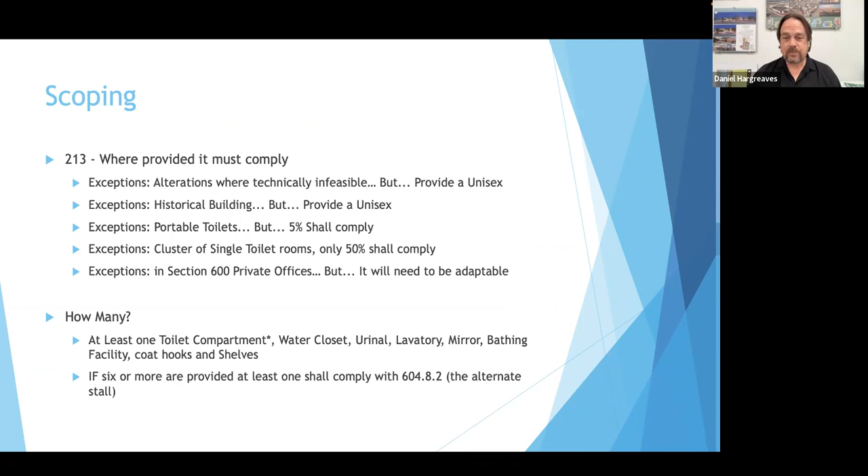So let's talk about that reach range for a second. So this is where the operational part of the device is. In these 2 photos here, surprisingly, both of these are non-compliant. Those are 1 foot tiles. Your reach range is 4 feet, and you can see that paper dispenser is above that 4 foot mark. That hook, the person didn't want to put it in the thin part of the door, but that's almost inaccessible for anyone that's 5 foot or shorter. So even something as simple as a hook, while you can get to whatever's hanging up there, you can't reach the hook itself.

So in the big picture, what is the reach range? This is in section 308, the building blocks. Anything from 15 inches off the floor to 48 inches above is within the reach range. And you're going to see I've done a little minor update. Of course, I mistyped it there, but in the 117.1 2017, there's no change to this reach range, and that's forward or side.

There used to be in the previous one, and you'll still come across this. The best example is typically a thermostat set at 54 or even 60 inches, which is outside of all reach ranges. While a thermostat is something where you're wanting to read the device, if you set it at 60 inches, which is a nice height to see what the temperature of the room is and to adjust it, in a wheelchair, front approach or side approach, you can't reach it when you mount them that high.

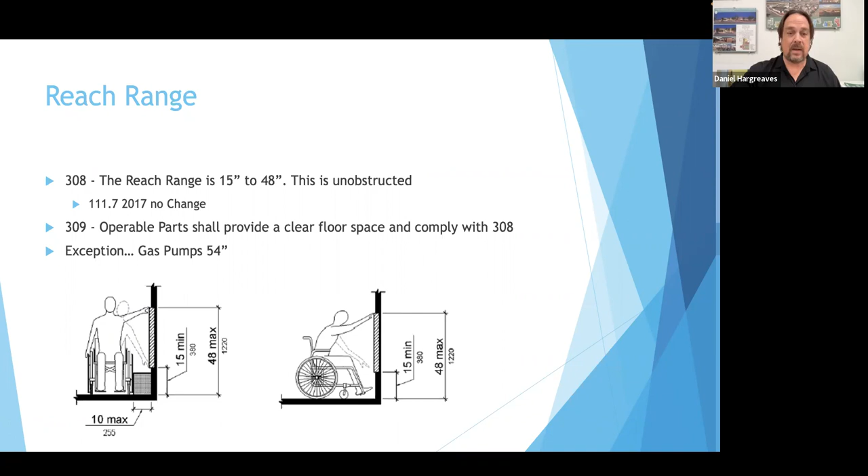There is an exception to the gas pumps, and part of this is obviously the safety of the vehicle, setting it up on the curb. As you know, most of your gas pumps are raised 6 inches above the driving surface and so forth. So that also comes back to the safety of the device, which has been recognized by the ADA and even the ANSI guidelines, that gas pumps still have that exception. And most people that pump the gas are actually standing when they do that. So there are exceptions to those rules, as long as they can get to and then operate the gas pump.

Let's get back to the building parts of the restroom. Clear floor space. This one under the new, and I see I have typed all those backwards. So your traditional clear floor space, think of it as the person in the wheelchair, and the space that they're going to occupy is 30 inches by 48. Across the board, that's what you would use. Objects that stick out from the wall, if it's above 27 inches, it can't project out more than 4 inches. So that impedes on your clear floor space.

Here's the first change of the 117.1 ANSI: 48 inches is now going to 52. Now, if I was real savvy, I would have had a good poll question. Why the bigger? It's longer, not wider, because that was some of the discussions. It's like, oh, bariatrics. No, that's not what they're addressing. It's actually the mobility scooters. They're finding that the typical size of the scooter sits in that space of 52 inches, not the 48 of the traditional wheelchair. And that goes the same with the turnaround circle under the ANSI, which is now 67 inches.

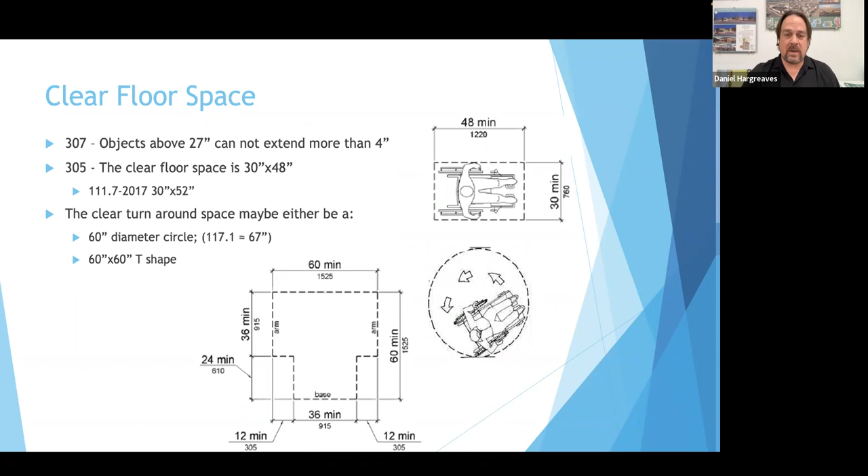One of the things to remember about the graphics in the ADA: they are supportive, but are not part of the actual guide or standard. There used to be several inconsistencies between a graphic and the verbal language. The verbal language now takes precedence.

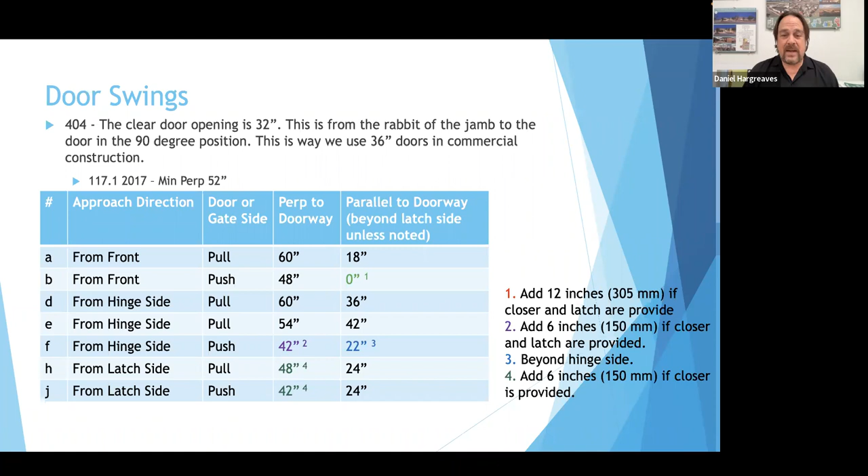And in the case of the door swings, you can see when you're perpendicular to the door, whether it's a push or pull, they're telling you how much you need to the side and how much you need behind the door. One of the things that's changed in ANSI is the minimum perpendicular distance now actually is 52 inches, which makes sense because your clear floor space is 30 by 52. So with 48 inches on the push side, you're in non-compliance under the new ANSI.

We're going to focus on four of the door configurations. These are the more typical. You have the push side and the pull side. What that's referring to in the graphics is whether you're pushing a door open or pulling it open. Think of it this way.

Why the extra room? As an example, you can see the one with the red square around it. Why do I have 12 inches to the side, but then I also have a push door that is straight on? This is in addition based on the hardware. And keep in mind that some of these say with both closer and latch, whether you need the extra space. Some are maybe just a closure, some are maybe just a latch.

And the reason behind that is, and typically it's the closer. So as you're trying to push that door open, the closer is trying to close it, and then it keeps relatching. So the extra maneuvering room lets the person in the wheelchair, or for that matter, if you have mobility challenges and you're on crutches or moving slower, that time delay between adjusting your position to get a piece of your chair, crutch, body, arm, etc., to hold that door open to finish your maneuvering and get through the door.

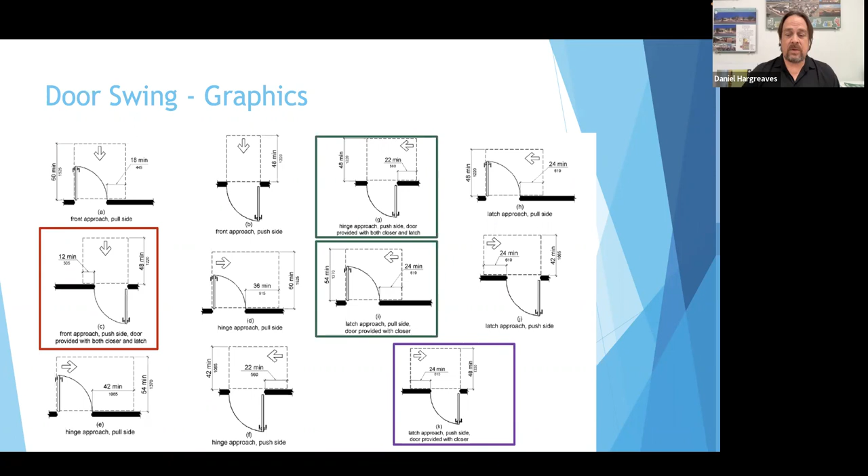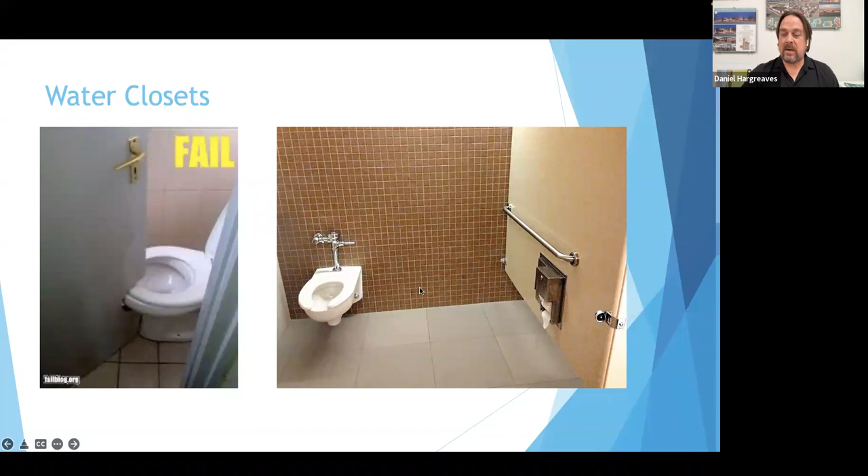So now that we've moved into the plumbing sections, the water closet, this is not inside of a stall. We need to keep that in mind. These distances are slightly different once you have a stall all around you. This is strictly for maneuvering around the water closet. Distance from the wall, you'll have 16 to 18 inches. It's now a range. Under the old code it was a static 18 inches, and this was probably the most typical failure, especially on a slab on grade project, because that toilet is a pretty tight exact to hit. You almost have to build your wall to work with the toilet after the toilet plumbing has been set. So now they give you a range.

My recommendation, whenever you see a range, is pick the number right in the middle, not the 16, not the 18. If you tell it in your design 18 inches, and the contractor does their early work at supposedly 18, but it ends up at say 19, you're now in non-compliance for the center line of that toilet. The clear space around the toilet parallel to the back wall, or the wall that the toilet is on, is 60 inches. Perpendicular out to it is 56. And then the height of the seat is 17 to 19 inches.

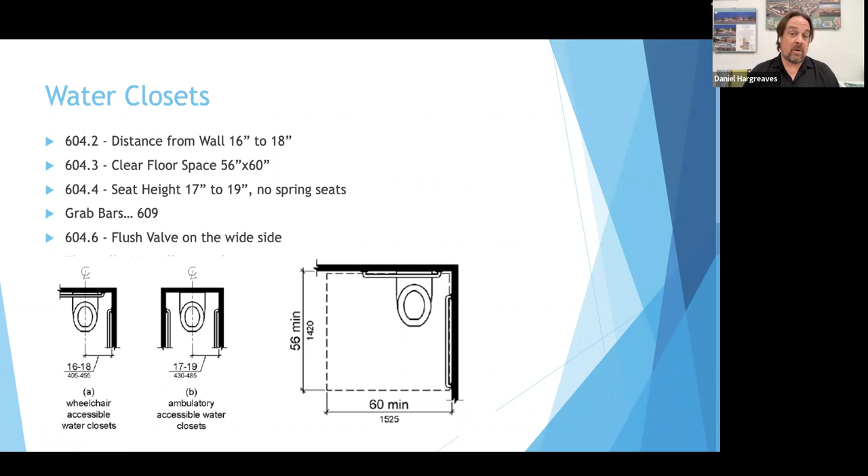And another common mistake is the flush valve. If you look here, your flush valve is always on the wide side, so it should be opposite of the wall. This is a real common mistake. If you have back-to-back toilets, the plumber will just order two left-handed flush valves; one will be correct and one will be in non-compliance.

And you can see here the grab bar distances. This is a minor change, but the side one's easy, pretty simple to figure out. The furthest the grab bar can start from the corner of the wall is 12 inches. The minimum length is 42, and then that other minimum is 54. So you can see 12 plus 42 equals 54. But what if I have a 48-inch grab bar? You're in compliance. Your grab bar actually is longer. It can either get closer to the corner or go further away from the toilet itself, as long as you meet the other minimums, or the max for that matter, the 12.

The back wall is a little different because our toilet has a range between the 16 and 18 inches. Instead of aligning the grab bar from the corner of the wall, so if you had your toilet at 17 inches with a 36-inch minimum grab bar, you would be 5 inches, not 6 inches from the wall, which used to be the old standard. So now it's based on your center line, 12 inches closer to the wall, 24 away from the corner of the wall on the wide side.

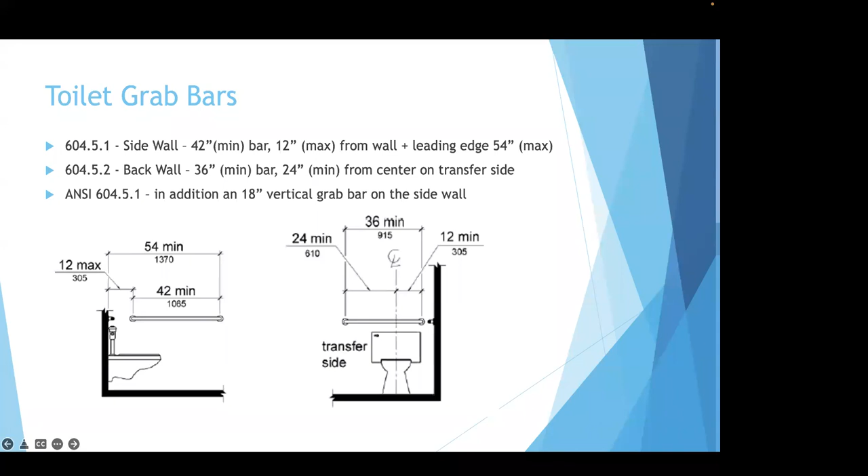You can see even with this tank type, they did illustrate it correctly with a flush valve on the wide side of the toilet. Daniel, is there ever an instance where you can have too much grab bar? You said a 48-inch grab bar is okay, but is there ever an instance when you can just go too crazy with your grab bars?

There's nothing that says you can't have more, unless the grab bar were extending and impeding access to another device within the space. That would be one instance: if you had a 5-foot long grab bar, 60 inches, and on that 60-inch end, you no longer can find a reasonable place to mount another device in the room.

Okay, thank you. One thing in the ANSI, which is not in the ADA, is there is a requirement for an 18-inch vertical grab bar. And the location of it, I had a slide that I used to show, and I don't know why I took this one off, but maybe it's on the next one. Nope. I'll get those numbers. I always have a cheat sheet at my desk. I want to say 31, but I know that's not correct.

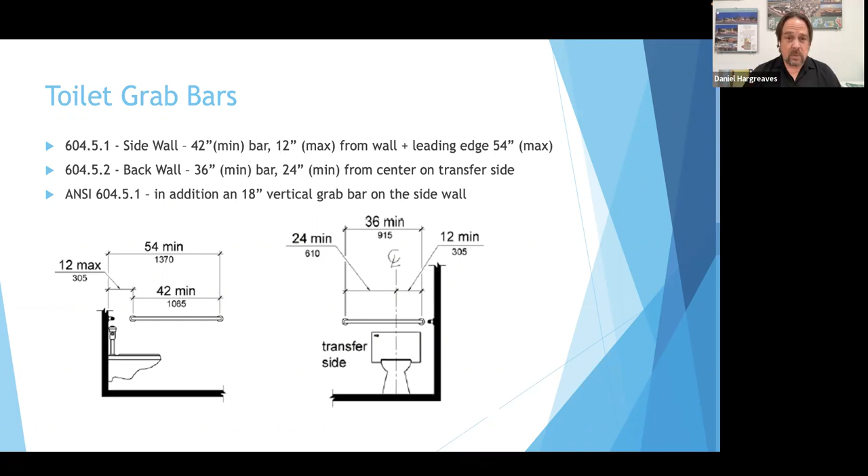But it basically places it about where this N is, and it's about 4 or 5 inches above this grab bar here, and runs in the vertical direction. And that's a requirement of ANSI, and it's even in the current one. The benefit of that vertical grab bar is actually for the elderly, or if you're having other mobility challenges, you can grab that vertical bar and help get yourself up where your knees aren't as strong. That's the intent of that vertical grab bar. It doesn't serve much of a purpose if you're wheelchair bound.

We're not going to be placing any urinals within our little test case coming up, but I just wanted to touch base on these real quick. The depth of the urinal, from the back of the wall to the lip out front, is a minimum 13.5, and I think all manufacturers now make them at 14 inches. When you go below that minimum height, all the way to the floor, keep in mind that with a full height urinal you still have to have it extend out the full depth. You're not waived from that.

And then once again, the height of the lip is a maximum of 17 inches. And then you need that clear floor space in front of it, 30 by 48, which goes back to the building block in section 305. Now under the ANSI, it's now 30 by 52.

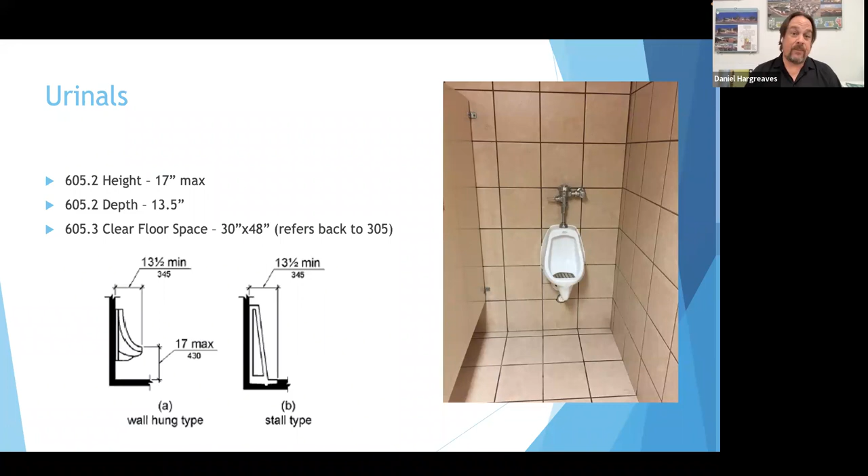We'll just touch briefly on the toilet compartments. This is for when you need a friend to help you. No, I'm not sure. It's just one of those photos that always caught my eye.

I think they took down the partition in the middle and said our partition is now in compliance at 59 inches by 60 inches. Well, in that space you can only have one element in there. There used to be an older standard where in a compartment stall you could have a lav in there also, but they found that that does impede maneuverability within the stalls, and those aren't permissible under the new one.

One of the changes here is you can see the depth is at 56 inches or 59 inches, depending whether it's wall hung or floor mounted. But under the ANSI, that now is a minimum of 60, period. So once again, they're accounting for the scooters entering those stalls to give them the maneuverability they need. The doors into the stall still have compliance with your door handing, your approaches, your clearances.

The simplest way to think about it is from the face of your stall to the face of your wall, you need those 42 inches. The furthest the door could be from the corner is 4 inches max. The reasoning behind that is if you put it, say, right in front of the toilet, there's no way to dismount back onto your wheelchair and then get the door open. So that 4-inch max puts that latch just within the range to where they can wheel out back.

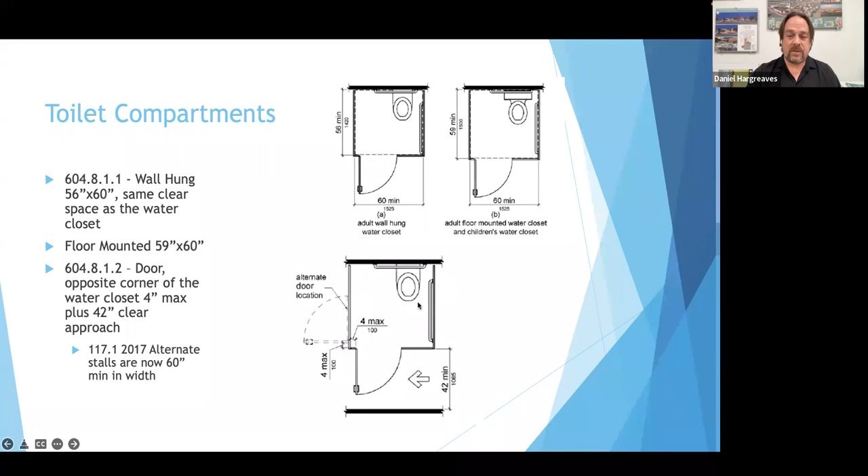Lavatories: while you can have the best design there is, once you actually start, there are so many items in non-compliance here: the height of the mirror, the rim of the sink, the cleared knee space under it. I mean, it looks gorgeous, but when you start adding each of the pieces together, there's a lot of non-compliance right there.

So this goes back to your lavatories, noted in 606, and they have a top height of 34 inches. The rest of the lavatory is driven by the requirements of your clear floor space and your clear knee space and so forth. So you have to go back to sections 305 and 306 to find all those requirements.

And you have, besides just the clear floor space of your 30 inches wide, your overhang of the sink onto the space, 17 to 25 inches, your toe space, and you can see as they have broken down each of the pieces, the bottom of the lav at 27 inches, the top of it at 34.

And remember that 34 inches is not to the counter height, but to the top of the sink. So if you have a drop-in sink, that's another half-inch higher, and if you set your counter at 34 and drop in a sink, you're actually out of compliance because that 34 inches is a max dimension.

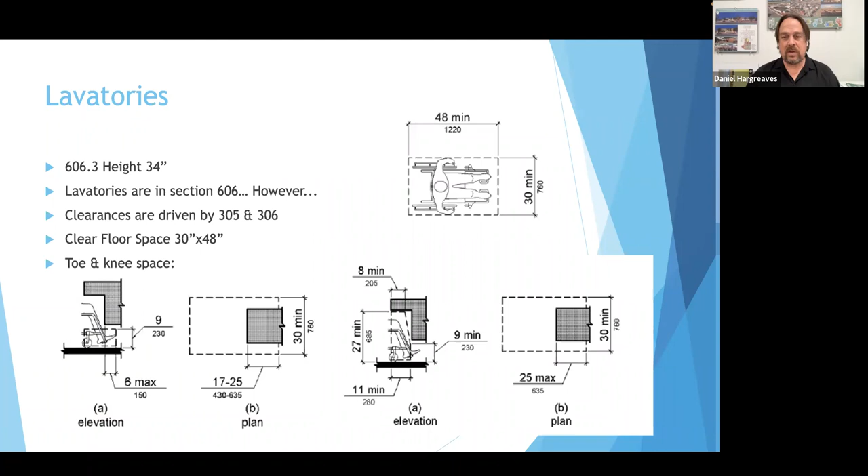And then, of course, no restroom is complete without your accessories. And almost every project in every facility with these giant double rolls, I would always find these in non-compliance. Here, they did a really good job in trying to get as many items, working with an automatic paper towel.

You can actually get them out of the reach range, because remember that 48 inches, and you can see here, these are actually set at 60. That's the 48-inch mark there. As long as I wave my hand at 48 and the paper towel comes out and I can reach it, you're in compliance again. But as you start peeking around, you'll see now I have uninsulated drain pipes. So that puts this back into non-compliance.

So let's talk about the main items that you're looking at: your soap dispenser, your paper towels, your waste receptacles, those all need to be within that reach range of 15 to 48 inches. Keep in mind, you're wanting to keep these items practical. And there are some exceptions where soap, if you're over the sink, I think it was in the previous one, the height of the dispenser is no longer 48, but 44.

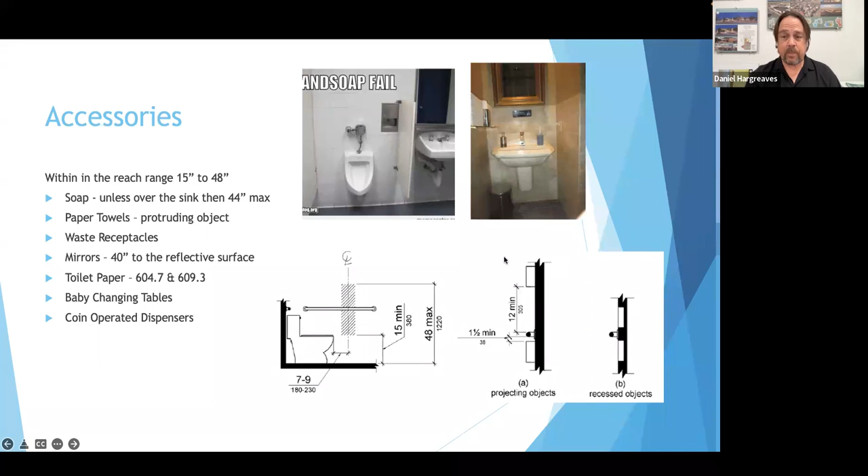So let's put those pieces together, and let's try and head to the left, not the right, and have a successful restroom. The first thing you want to do is, in the corner of your room, since that's your driving factor, those 2 grab bars with your water closet placed 17 inches over. As we talked about, if we work with the middle number of that range, that sets your water closet at 17 inches. Then you set your grab bar from the center of that water closet, 12 inches in the case of this one to the right side, 24 inches to the left side.

12 inches off the back wall, the length of the grab bar at 42. And then the clear floor space, along the wall of the toilet 60 inches, and then perpendicular out 56. And then don't forget, if you have a requirement to be in compliance with ANSI, place your 18-inch vertical grab bar.

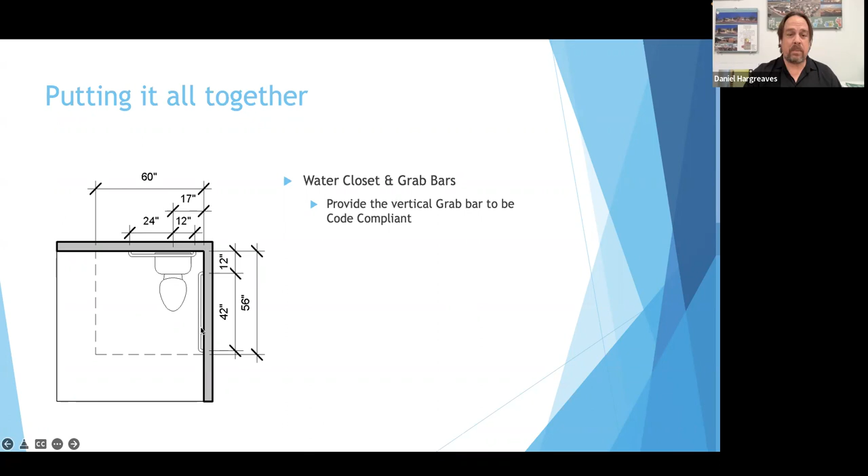So the next element now to figure out the width is I can actually have clear floor spaces overlap each other. If you remember at a lavatory, I had a 30-inch by 48-inch, and I had a range between 17 and 25 inches for the overhang. So I can actually place the lav, if it's wall hung, on less than my total depth. So I placed the lav next to the 60 inches, and then 15 more inches from there for the lav. And this is where you're getting down to nitty-gritty inches, but there's your minimum dimension.

I placed the lav on the edge of the water closet clear floor space, 15 inches over from its center, which sets that back wall length at 86 inches. Now, if you have a little wider lav, you may need to adjust that. Keep in mind also that 15 inches, that's a general rule of thumb, not a requirement.

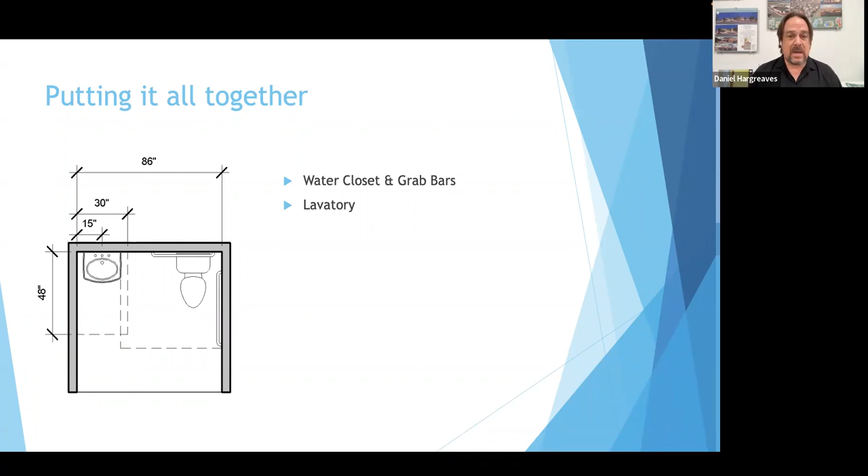There is nowhere in the ADA or the ANSI... I believe in California Title 24, there is a specific requirement that it does have to be centered on the clear floor space, but under the other codes, ADA and so forth, it can be anywhere within that 30 inches. So that 15 inches is not a minimum, it's just a good rule of thumb.

So now we go the opposite way. In the case of the pull side of the door, back to our door section, we needed 60 inches. So if I measure 60 inches from the face of my lav, that puts that restroom at approximately 84. Then once again, if you have a deeper lav, you'll need a little bit more space. And I base these on typical sizes.

On the pull side of the door, I also have 18 inches on the pull side, and you can see we now have 3 clear floor spaces, the one for the door, the one for the water closet, and the one for the lavatory. They're all overlapping. A common question that we would get: you'll see the door is swinging into the clear floor space of both the lav and the water closet.

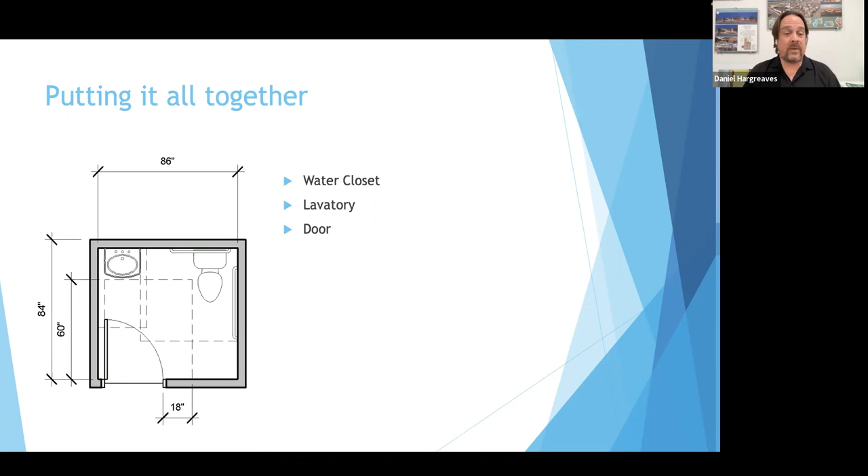In a single-use restroom, as long as beyond the swing of the door you have the minimum required clear floor space, that 30 by 48, or now under ANSI 30 by 52, it's fine, because the door is a temporary object. You have the clearances to get your wheelchair or yourself out of the way and then get the door closed. So the door is allowed to swing over those clear floor spaces under current interpretations.

And then the final piece, putting it all together in the plan and the elevations here. So you want to make sure you have that 60-inch circle. We have our 84-inch by 86-inch restroom. We have all our accessories. And if we look at the elevations here, the toilet seat cover tucked in the middle, as long as the operable piece of pulling the toilet seat cover out is within the range and I can get the wheelchair straight onto it. I have my 30-inch clearance.

I can mount it above the grab bar because I'm not projecting out beyond that 4 inches. So I'm allowed to place that. For toilet seat covers, I always recommend the flush mount to get your best compliance there. Your soap dispenser, in this case, I'm showing it at 44 inches. Technically, it is clear of the sink, and you could mount it at 48, but remember the use and operation: you're reaching over the sink, so best practice is to mount that soap dispenser at 44.

The top edge of the lav at 34 inches, that goes back to section 606. The reflective surface of the framed mirror is at 40 inches. And then in the case of this water closet example, I have an 18-inch high toilet seat, so I'm in compliance there. And then I've set my grab bar at 33 inches. And then from the front edge, I'm right within the range.

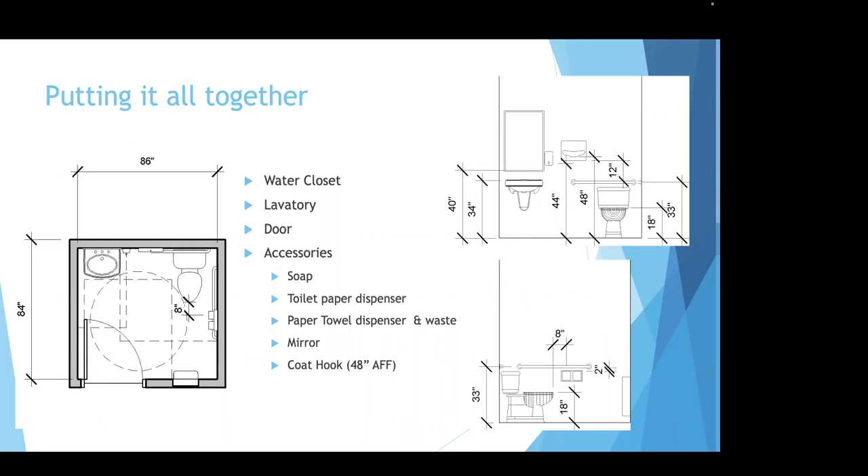You mentioned COVID, and that towel dispenser and trash location being better because people like to use a paper towel to pull the door open. But have there been any other changes or additions? Are people suddenly starting to introduce hand sanitizer dispensers or something like that? I guess there's nothing to code yet.

There isn't. And that's not even a code requirement to put it next to the door there. That's a personal design preference to keep it out of those clear floor spaces. Hand sanitizers, once again, if you're not projecting more than your 4 inches and you're not reaching over anything, you could place a hand sanitizer right here in that 18 inches of the door. So right before you leave or you have just opened the door, you can use the hand sanitizer. And because you're not reaching over anything, you can mount the operable part as high as 48.

And once again, any of these devices that are automatic, as long as the sensor can be activated at that 48-inch height max, you can mount those automatic devices a little higher than the 48. Best rule of thumb is start at 48. That's pretty comfortable now that we've been doing this for 30 years. But there are now options and exceptions to that.

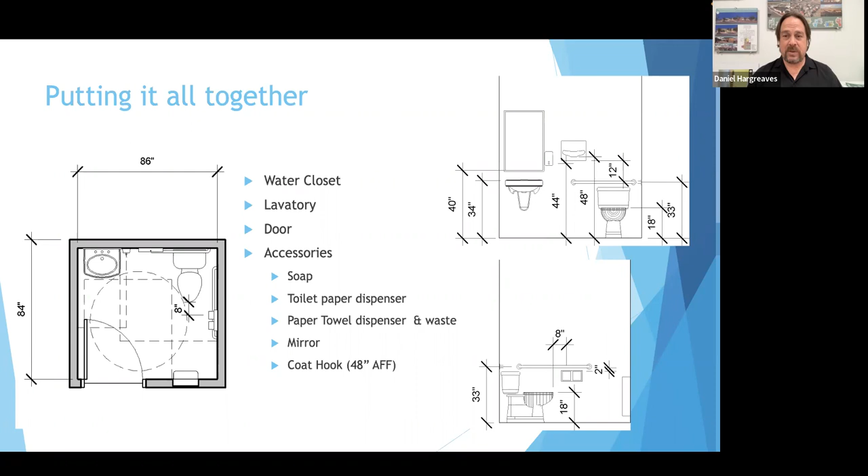Yeah, and this has been fabulous, Daniel. Thank you very much. It's always something that no matter how much you do it, you always can use a reminder, because it always seems you get it just about balanced, and then there's one thing that screws it all up. This has been fabulous.